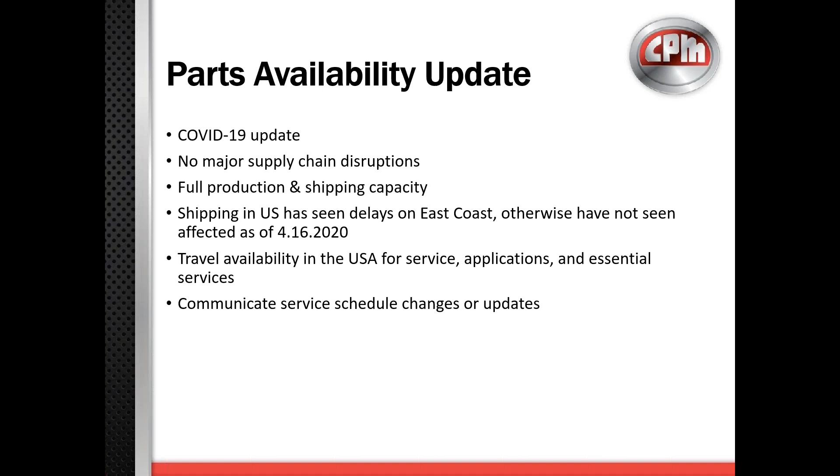We also continue to have travel availability in the US for service techs and application engineers. We do, however, notice that many companies are trying to limit contact, so this is only for essential and scheduled trips. If you have a service schedule change or on-site visit that you want to change, please communicate this with us and we can reschedule it with you as well.

We are providing this webinar from the US, but do have many people from across the world attending. Our company continues to offer OEM parts for your CPM equipment on a global scale. OEM parts hold our manufacturer's guarantee. They will be the right part, the right fit, guaranteed.

Purchasing our OEM parts also allows for access to application engineers, design engineers, local CPM rep support, and can reduce the downtime in changing parts, as you will know they will fit. We will also be working with our global CPM locations to provide this webinar or a similar aftermarket webinar in a translated version.

We wanted to highlight the importance now more than ever of having your recommended spare parts or critical parts on your shelf. Every part on your CPM equipment is available through CPM. We can create this recommended spare parts list for you and create it on a serial number specific list. This can be for new machines or for very old machines.

The recommended spare parts lists are typically 3 sections: on hand or critical wear parts with an estimated longevity before needing replacement - an example could be 5 to 7 years - and large item parts or extended wear parts such as hammer mill rotors, roller mill rolls.

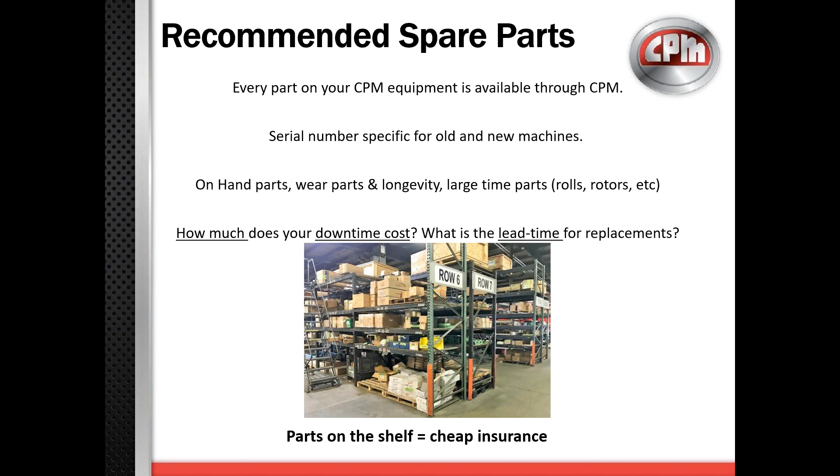Some quick math can be completed to see if the parts on this list are crucial. One, how much does your downtime cost? Two, what is the lead time for replacements? If you have a catastrophic failure, how long can you afford for the machine to be down - hours, days, or even months? Parts on the shelf are always a cheap form of insurance.

Now I will explain the in-house services offered in Crawfordsville, Indiana. Parts don't wear out often on CPM equipment, but when they do, our team of experts will come to your rescue. One of the services we offer is a pellet mill die rework service.

If you have a die that isn't producing the quality of pellet or throughput it once did, you can send it to us to be reworked. We perform this service by punching out the material of the die holes, grinding the die face even across the die, removing any high or low spots, and making it 100% true again.

Once that's completed, we countersink the die to make the working face look new. You now have a revamped die that is ready to be put back on the pellet mill and make more pellets.

Next, we provide a pellet mill roller rebuild service. If you have a bearing failure or a roller shell that is worn out, you can send them to us, or we can schedule a truck to pick them up so we can rebuild them. We help you save money by only replacing the most consumable aspect of an assembly instead of the entire unit.

By using our own OEM and other high quality parts, we ensure your components return to you in like new condition. We use only the highest quality bearings available. Plus, we never use parts that were reverse engineered. Since we have the original blueprints, we're able to use OEM parts that fit your equipment the way it was meant to. Our quick turnaround means you'll experience less costly downtime. It's another reason to stay CPM when you start CPM.

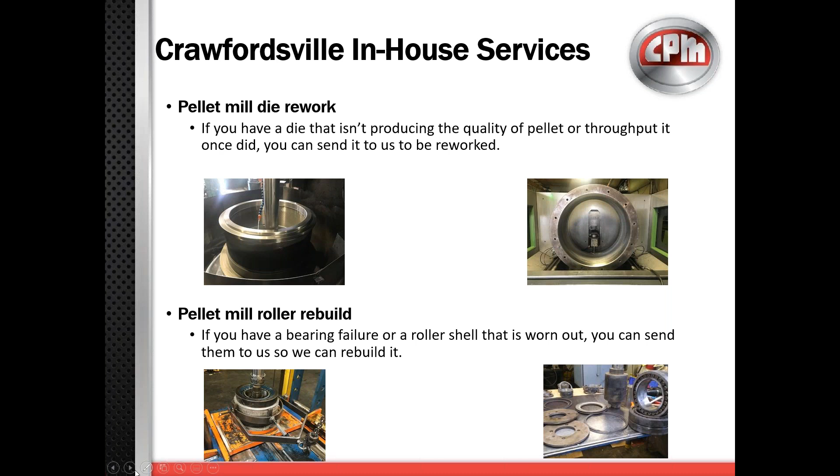Lastly, we offer a Lineator exchange program. If you have a Lineator that isn't operating like it did when it was new, you can exchange it for a rebuilt unit. We offer the exchange program for the Lineator gearboxes and air motors. When taking advantage of the Lineator exchange program, you will never be operating your pellet mill without a Lineator.

If you experience an issue with your Lineator, whether it is your gearbox or air motor, all you have to do is notify the sales team and we will ship you a rebuilt unit. Once you receive the rebuilt Lineator, you can install it and ship back your unit for a core deposit. It is then rebuilt and added to the exchange program. This is a great option because once again, you are never running without a Lineator. It is often more cost effective to exchange your Lineator for a rebuilt one than rebuild yours.

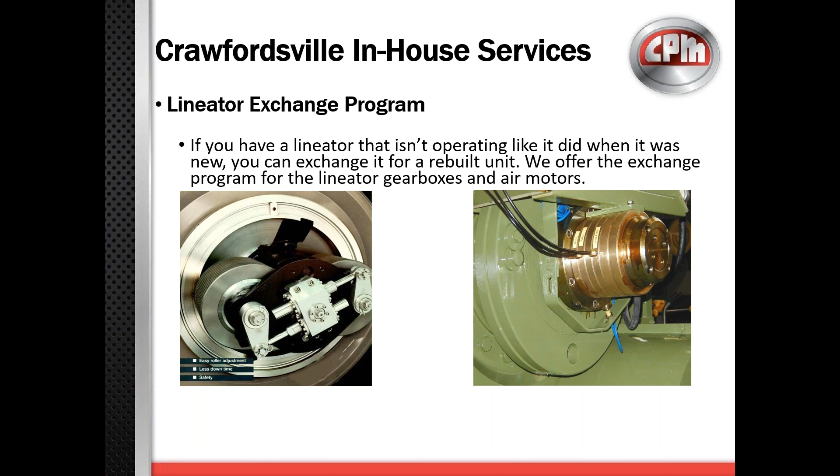Tanner will inform you about the services offered for the particle reduction equipment in Waterloo.

In Waterloo, we offer full recorrugation service on rolls ranging from 6.5-inch diameter by 6 inches long to 16 inches diameter by 84 inches long. We also have the capability to corrugate up to 28 by 62 flaking mill rolls. Part of our recorrugation service is to accept rolls with the bearings still attached.

We complete bearing inspections and diagnostics to review the condition of the bearings, seals, and other components. We do not automatically replace the bearings when they come in, as most bearings will last a long time with proper preventative maintenance schedules. If any components do need replacement, we complete a quote and check this with you before installing any components. The rolls will then ship back to you with the repacked and pre-greased bearings ready for installation.

We also have recently invested in more new corrugating machines to increase our capacity and shorten your lead times. Lastly, we do offer freight scheduling options. This can include round-trip freight to make the service easy for scheduling roll pickup and drop-off at your facility.

Another in-house service is hammer mill rotor rebuilds. This can further extend the life of the rotor. One important note is that we can rebuild a wounded rotor, but we cannot rebuild a dead rotor. This means that there are several things that we can walk you through by contacting us for some on-site inspections before sending the rotor in. When this rotor is rebuilt, it will again be balanced to G1 specifications.

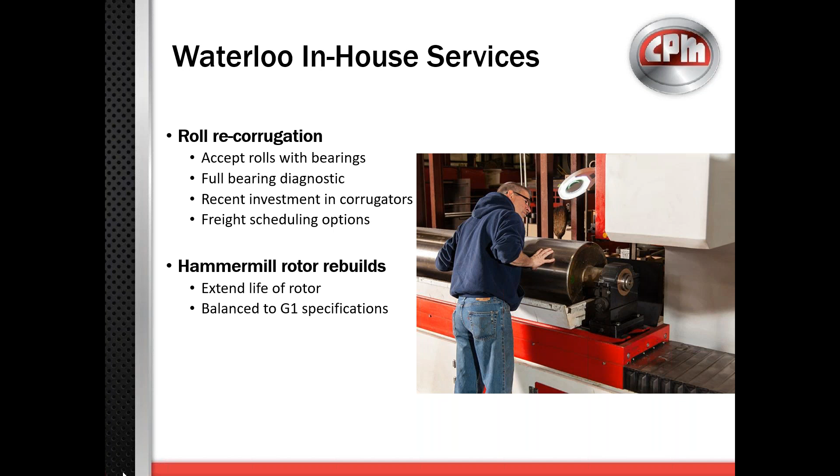Another in-house service is training at our facility in Waterloo. We offer several different training types and subjects for anyone from mill managers, operators, maintenance, new hires, and more. This is in both a classroom setting for applications engineering training, as well as hands-on equipment training with full access to our test center during training to use our different equipment lines. This experience can be a valuable way to consolidate ideas from multiple different locations or divisions of your company. Contact us to schedule your company visit to CPM.

The test center. Are you getting the most out of your CPM equipment? Chances are we can help you discover a more effective process at our state-of-the-art test center facility. Located in Waterloo, Iowa, the test center has our complete line of equipment, automations, and controls, and it's fully operational all in one place.

If you have material that you need to reduce or densify, you can send us a sample and we'll run it through all the paces. We monitor and record every step of the testing process, and we can give you a full detailed analysis of the results. Our reports contain valuable advice on pelleting and particle size reduction, along with specifications and recommendations to grow and improve your process operations. No matter what your unique specs are, our test center can help you gain optimal results out of your equipment.

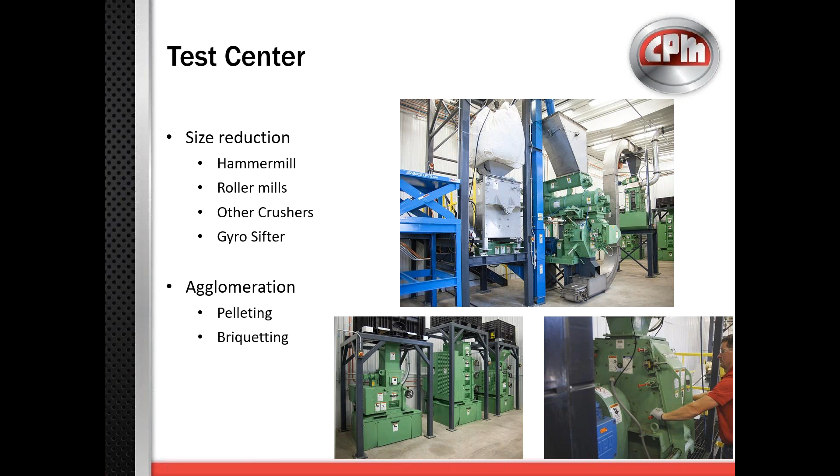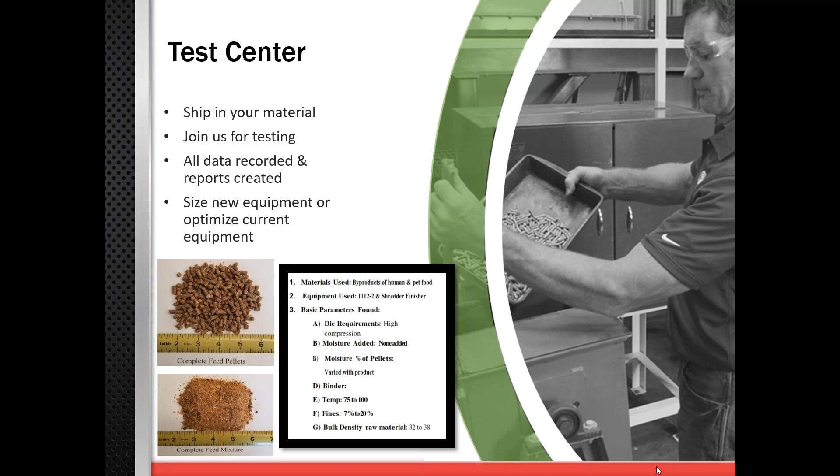To work with our test center, you can ship the material in for us to process and provide reports as shown below, or you can join us in the facility for testing. This allows you to go through the steps of testing with a true hands-on experience with our equipment and Beta Raven controls. All of this data is recorded and you will have full access to the reports created. This can be useful for sizing new equipment for your project or to optimize your current equipment. With this, Aaron will bring you more about our field service.

Now that we have gone over the services we offer in-house, we'll talk about the ones we offer in the field. Our field service and on-site audits can assist you in running a tighter ship. Whether you've had your equipment for 6 months or 30 years, our experts are here for you. Call on us for optimization solutions, help replacing parts, and any other support you need.

On-site training for your team by CPM will ensure effective and efficient operation of your CPM equipment. Whether you have a team of veterans or newbies, they will benefit from this service. Our team of applications engineers and service technicians will work with you to ensure you get the most out of your CPM equipment, improving performance and efficiency to improve your bottom line.

Some of the field services we offer are maintenance audits, applications and process audits, maintenance training, operation training, equipment conversions and retrofits, and lastly, parts installations. These are all performed by qualified employees that make sure safety is the number one priority.

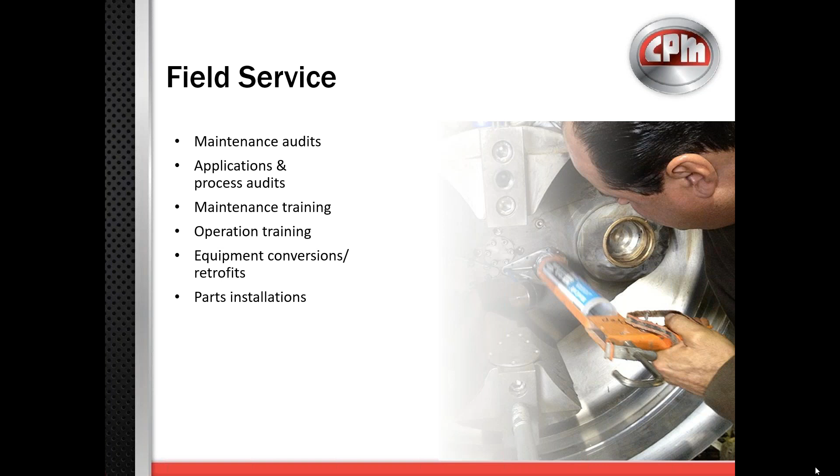Being educated about the parts on your CPM pelleting equipment is very important. That is where CPM steps in. The CPM customer service team has lots of years of experience and knows the customer's equipment very well.

Reduced downtime - everyone knows time is money, which is especially true of our valued customers. That is why we do what we can to keep your machine's downtime to a minimum. CPM OEM parts are designed to withstand whatever extreme operating conditions you need in order to stay on top of your productivity and meet your customers' demands.

CPM offers every part your pellet mill needs, from small fasteners and seals to large main shafts and gears. Whether you're replacing a part or just want to have a spare on the shelf, get your parts from the place they got their start.

All CPM parts are carefully designed and manufactured to guarantee they are direct replacements for the original parts your pellet mill was built with. We stock parts for machines sold decades ago and days ago to guarantee minimal downtime. And we offer quick turnaround times thanks to our large inventory.

CPM offers the latest and greatest enhancements and conversions to your pellet mills. For example, a few of them are Lineator remote adjustment, roll speed measurement, lube systems, seals, two-piece quill assemblies, die clamps, and conversions to increase die diameters or die widths.

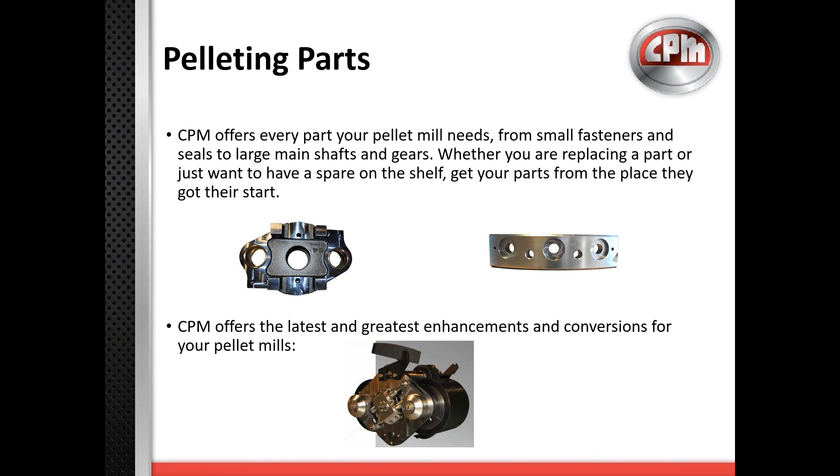Although our machines last for life, certain parts wear out over time and need to be replaced, reworked, or rebuilt, one of them being your die. CPM manufactures every pellet mill die with extreme precision using top-of-the-line equipment and the highest quality steels. Every pellet mill die is specifically manufactured to each customer's die specification and machine type to guarantee proper fit.

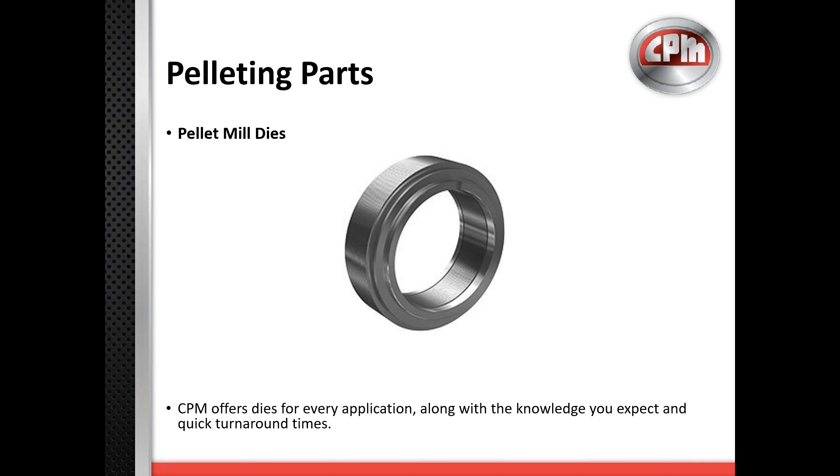Through the vast amount of years our sales reps, applications engineers, and testing experience we have in our lab, we can help you spec the right die for your application. We will assist with choosing the correct material, heat treat, hole pattern, and more so you can achieve your desired pellet durability and throughput. CPM offers dies for every application, along with the knowledge you expect and quick turnarounds.

Another crucial wear item on your pellet mill are the roller assemblies. Since they're made with the original specifications, like all of our parts, they will fit right the first time, which means less time taken out of productivity. It's just another reason why you should stick with CPM.

CPM manufactures every pellet mill roller shell with extreme precision using the highest quality steel. Our roller shells provide high resistance to abrasion, breakage, and corrosion. We offer the full range of shell corrugations for all pellet mills and applications, including dimpled shells, diamond shells, hard coat shells, helical, closed-end, and open corrugated.

CPM manufactures and rebuilds roller shell assemblies using genuine CPM components and high-grade bearings. And we offer quick turnaround times thanks to our large inventory. When rebuilding roller assemblies, our trained team inspects the parts, so we are only replacing the necessary parts to save you money.

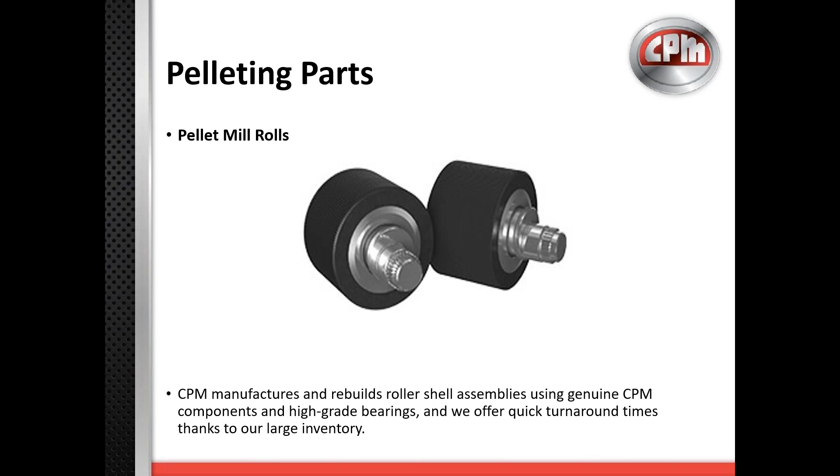To prevent downtime, make sure you have the OEM parts you may need on site where you can readily access them. It is good practice and highly recommended to have an inventory of spare parts on site for preventative maintenance and to replace wear items as needed. CPM has a large inventory of parts to support your equipment, new and old, at our warehouses. We sell every part possible needed for your equipment.

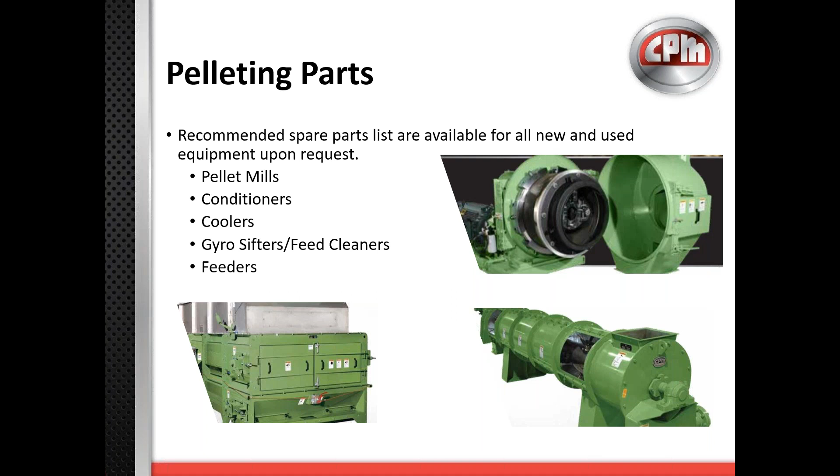As Tanner touched on earlier, recommended spare parts lists are available for all new and used equipment upon request. It doesn't matter if the equipment is from the 50s or is still being built. The CPM equipment we'd be happy to send you a recommended spare parts list for are pellet mills, conditioners, coolers, gyro sifters, feed cleaners, and feeders. Here's Tanner again to explain the parts offered for the Roskamp equipment line.

As Aaron previously mentioned, for our equipment, downtime is expensive. Take time to assess your physical inventory for critical OEM parts such as hammers, screens, cheek plates, and rolls. It is good practice and highly recommended to have an inventory of spare parts on site for preventative maintenance and to change out wear items as needed. We can assist with providing replacement parts and also any parts that may have been retrofitted or updated to further improve your equipment.

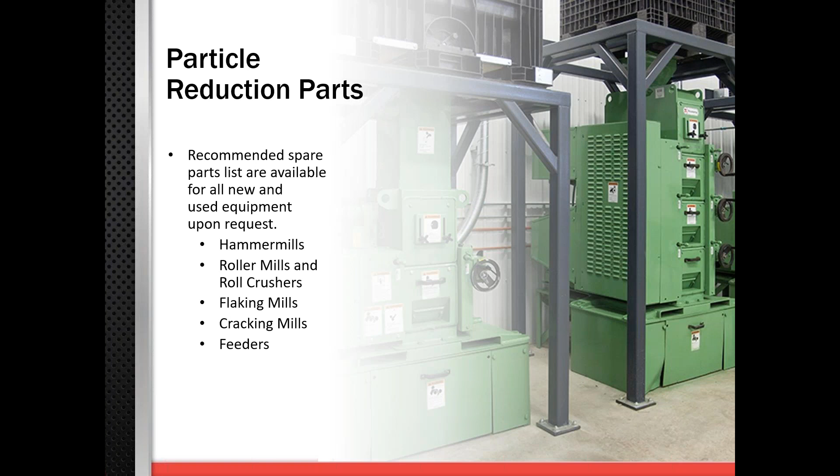Diving back into the recent feed spec question, feed companies, especially hog, are changing their feed formulas and are now looking for a grind around 800 to 900 microns. Most of the machines in this category are operating a 44-inch or a 54-inch machine, which are not exactly designed to create a grind that coarse. However, there are various ways that we can help get coarser, but the most important factor will be tip speed.

I will cover a few updates here. Please contact your local CPM rep for more information and assistance on this subject. Some options are slowing down the rotor if equipped with a VFD. If you are looking to add a VFD to the motor, check to make sure the motor is VFD capable. Make sure the hammers are in the coarse position. Many hog feed customers have recently moved to all fine rotors in recent years, so this may not be an option.

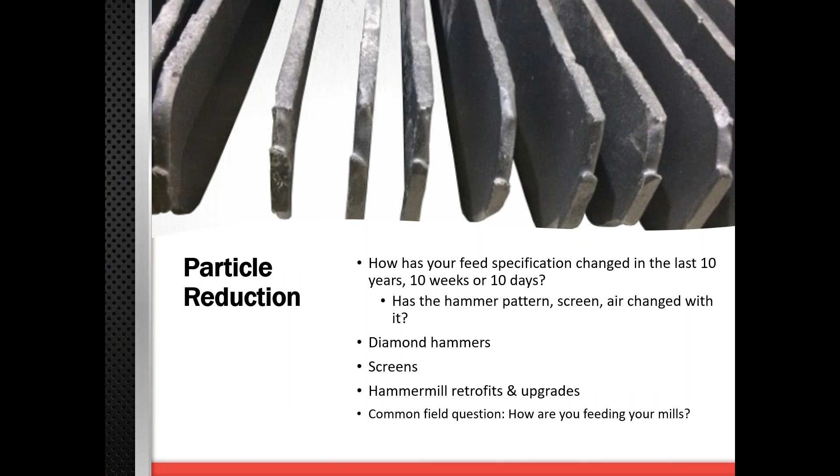There is another option of moving to a lighter hammer pattern, but be sure to observe for pin wear and hammer hole elongation. Another option is checking your grain temperature and moisture. None, some, or all of the above may be viable options. Please reach out to us if you have any questions or need further information.

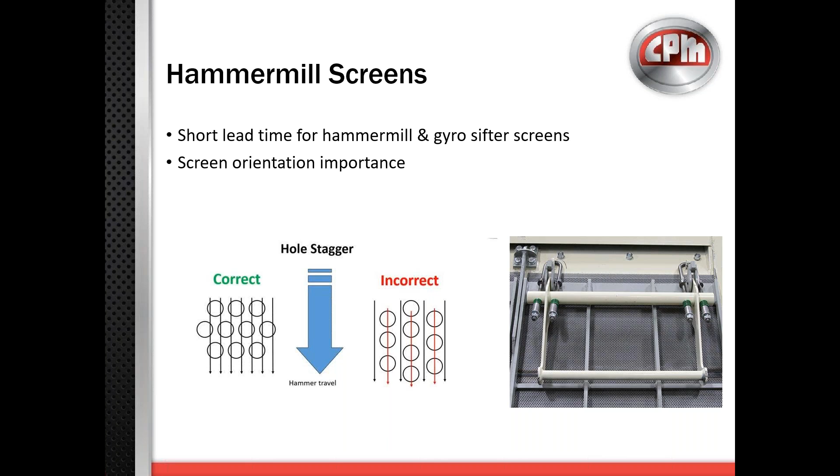On the roller mill lines, similar to our point about formula changes in hammer mills, roll corrugations should be selected according to the materials being processed, as well as desired finished product requirements. Has your incoming product or finished product changed? A review of your corrugations may be beneficial. Contact us with your requirements, and we may be able to apply our applications knowledge and also recorrugate your rolls at our facility.

We are a supplier of rolls and wear components across all of our roller mill lines, including crackers, crumblers, and so on. We also provide the added benefit of equipment conversions, such as increasing the roll size while continuing to use the same frame size, maintaining the same footprint of the machine, but also increasing the roll surface. Most of these conversions will increase capacity by nearly 20% or increase the roll life by nearly 20%.

A retrofit for product accuracy may be our Smart Gap Retrofit, which offers an automatic roll adjustment aimed to efficiently change the rolls in operation to ensure your product maintains grind spec. We also have multiple maintenance door conversions available that can increase safety and reduce downtime.

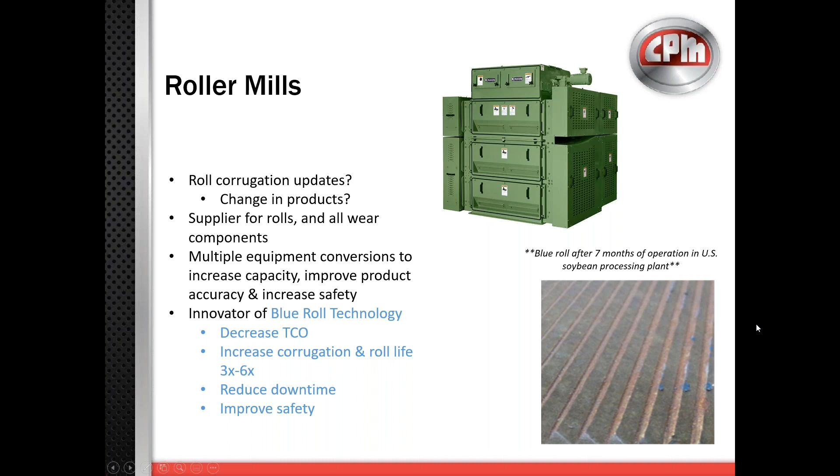With thousands of machines operating in the field, we fully support all wear components on the flaking mill. We are a roll supplier of every flaking roll in our machines and can offer the supply of the quality that fits your application and your choice. We often have a large inventory of rolls to meet short lead times.

We have also started supplying 2,800 rolls with bolt-on shafts. We believe that this type of shaft will improve consistency and also roll surface heating.

We have improved our offerings and conversions for flaking mills in recent years. We have multiple retrofits and conversions for Mark III and newer flaking mills, including IRD retrofits to improve the belt life, dual acting cylinder retrofits, scraper retrofits and updates, feed gate override retrofits, and many more. These are all aimed to improve flake accuracy and consistency, increase machine life, update to new safety standards, update equipment hydraulics, and also reach the original equipment capacity.

This last point is very important. We have seen most Mark IIIs and older machines operating in the field at roughly 60 to 70% capacity. With these new retrofits, we should be able to reach the original capacity of the machine. Contact us with your equipment serial number for more details.

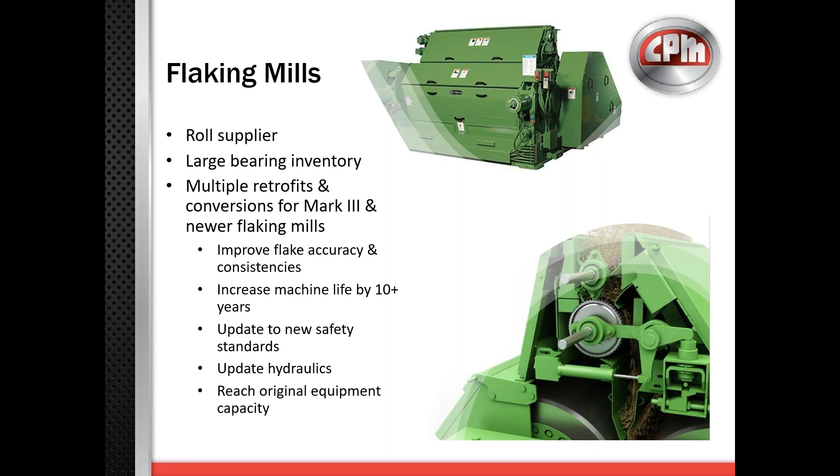CPM is excited to announce we will soon be bringing an online ordering platform for parts to the US. The expected release date is the summer of 2020. This will link directly to SAP B1 and is already in full operation at our CPM Europe branch.

The online portal is a customer-specific account. This means that it will have the functionality to link to one billing account and have several purchasers or employees who can create their own separate access portal.

We will have full functionality for several of the steps throughout the ordering process to make this easy. You can request quotes, process orders, research order history, duplicate previous orders, research the status of current orders, find order shipping details, and easily import Excel files for quick shopping.